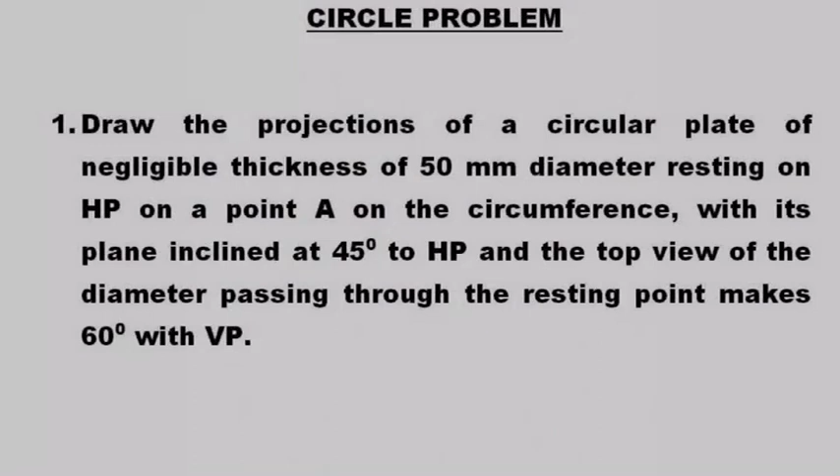Hey guys, in this tutorial video, you're going to learn how to orthographically project a circular lamina. Let's look at the question, note down the data one by one, and let's start solving this problem.

So here we have the data from the question that we read just now. In this problem, the lamina given is a circular plate with negligible thickness. When it has negligible thickness, the circular plate becomes a two-dimensional plane.

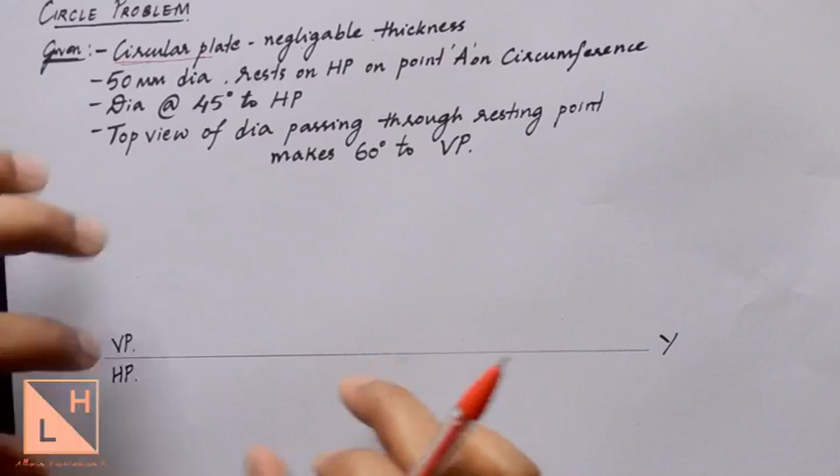Now, as usual, when we draw the first position, you need to answer two questions. Remember, whether you need to draw it in VP or you need to draw the plane figure on HP. Now, in order to identify that, you can go on reading the question.

This lamina is having a diameter of 50 mm and it rests on HP. When the lamina rests on HP, you must draw the plane figure on HP itself, that is below the line.

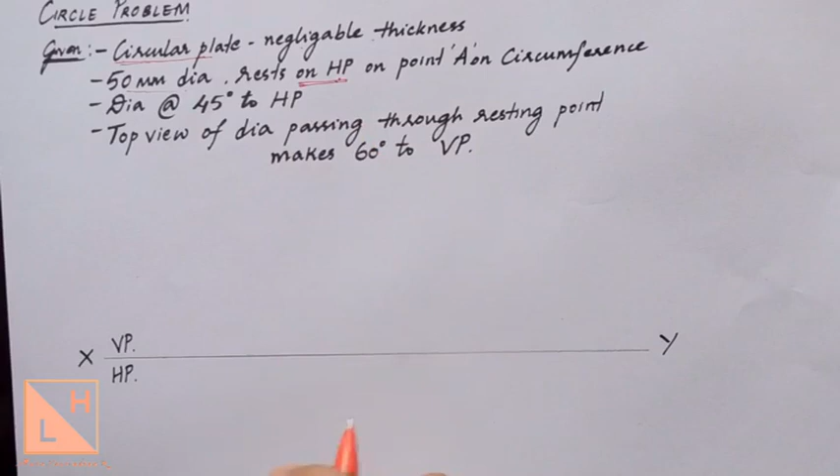The diameter given here is 50 mm, so we'll take the radius of 25 mm in the compass and draw a circle on the horizontal plane. Mention the diameter given as 50 mm in this problem.

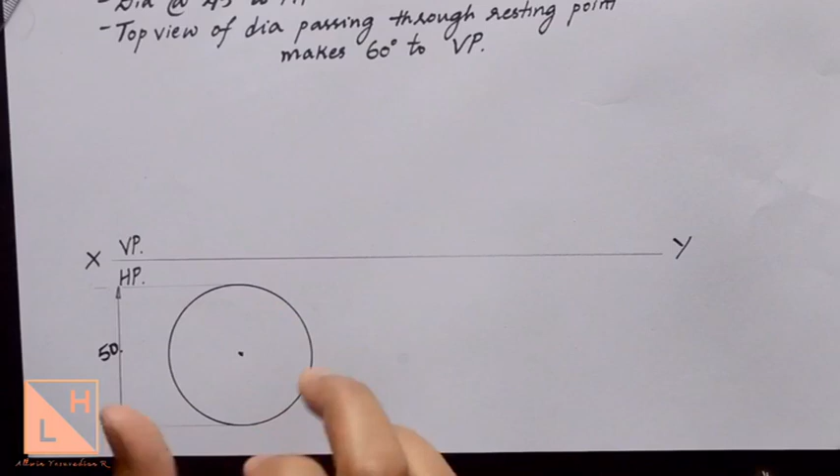Locate the center. Now we do not have any corners to name in this circle, but in order to project it by applying the conditions one by one, it is required that we must have some reference points in order to shift the circle from one position to another and then proceed with respect to the given conditions.

So what we do when we have a circle problem is divide this circle into an equal number of parts. There is no rule that you have to divide it into 4 parts, 2 parts, 8 parts or 16 parts. It all depends on you. But the best number to divide the circle in plane surface is 8.

Now let us divide the circle into 8 parts. As we know, the total angle for a circle is 360 degrees, so divide that into 8 parts. We need to draw 45-degree lines continuously so that we get 8 parts equally divided.

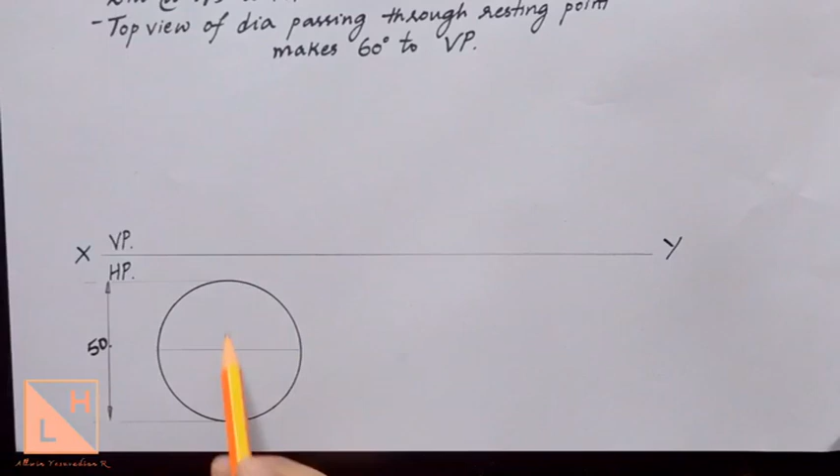So now it is divided into 2 parts. Now it is divided into 4 parts. Use a protractor, mark a 45-degree line on both the sides.

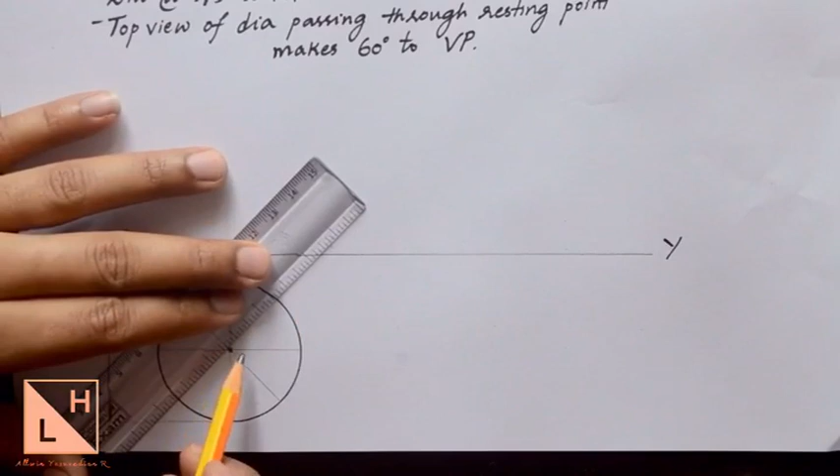So now we have divided the circle into 8 equal parts. Remember, only the lamina should look dark. All these lines drawn to divide the circle should be drawn with thin lines.

Because this is nowhere related to the plane, we are generating these lines only for our reference to project the circular lamina in the next positions. So you can name them right from the first point, but before naming it, let us look at the question.

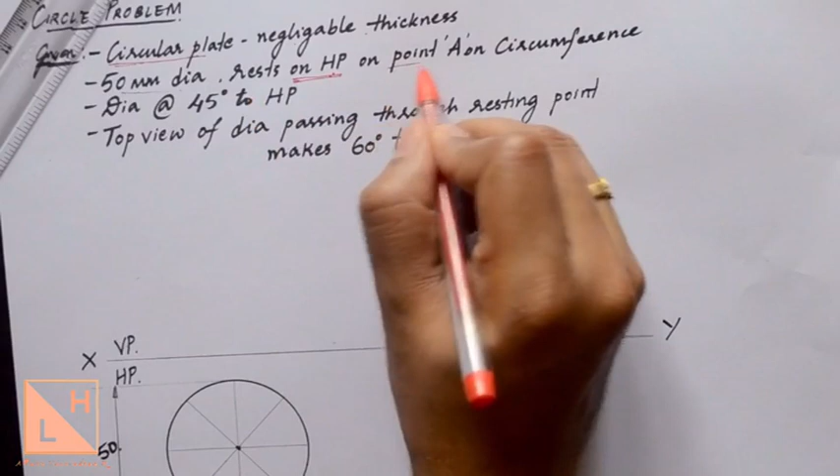It says that the lamina rests on point A on the circumference. According to the drawing procedure that we do in the previous problems, the reference point, whether it is resting on edge or resting on corner, we always used to keep it on the left side.

Now this is resting on a point and the name of the point is also mentioned as A. So we will name this point A on the left side of the circle.

That completes the top view of the circle. Now if the lamina is looking like a plane in the top view, it must look like a line in the front view. So let us draw projection lines from all the points that we have got here.

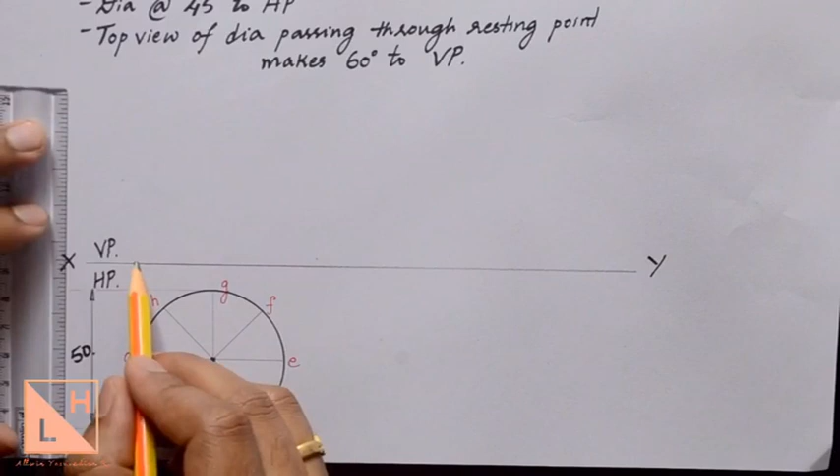Above A you will get A dash, and likewise. So this is point A. Above A you will have the front view of point A, that is going to be A dash.

Looking from bottom to top direction, the first point is B. On the same line we will also find H. So B and H will be together, but H dash should be in bracket because it is behind B.

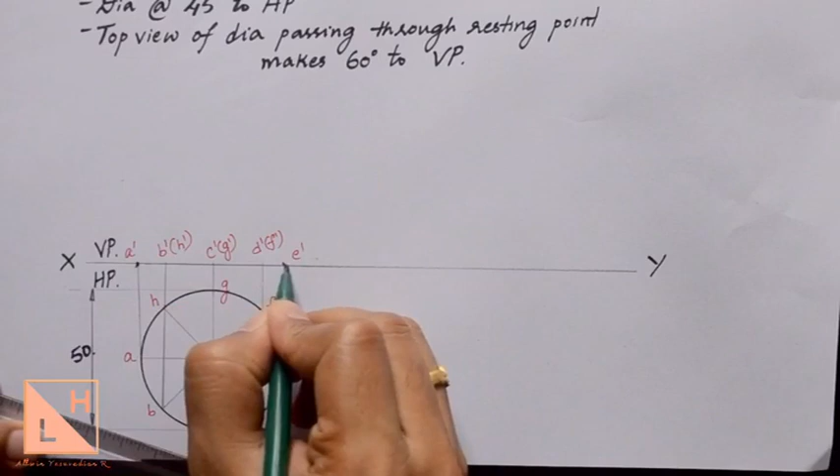Do not forget to darken the front view of the lamina. The front view has to be drawn from the leftmost point to the rightmost point of the circle. The leftmost point is A, the rightmost is E. So connect a line for the front view from A dash to E dash.

So we have done with the first position. Let us look into the next condition that we need to implement in the second position.

So if you just have a look at the given conditions, we have a circular lamina, 50 mm diameter, resting on HP on point A. All these things are done. So we have one condition with HP and one more condition with VP.

Which condition should be taken first? Just refer to the first position where you have drawn the plane figure. In this particular solution, we have done the plane figure in the top view because the lamina was resting on HP. So where you have the plane figure, take the condition with respect to that plane and implement it in the second position.

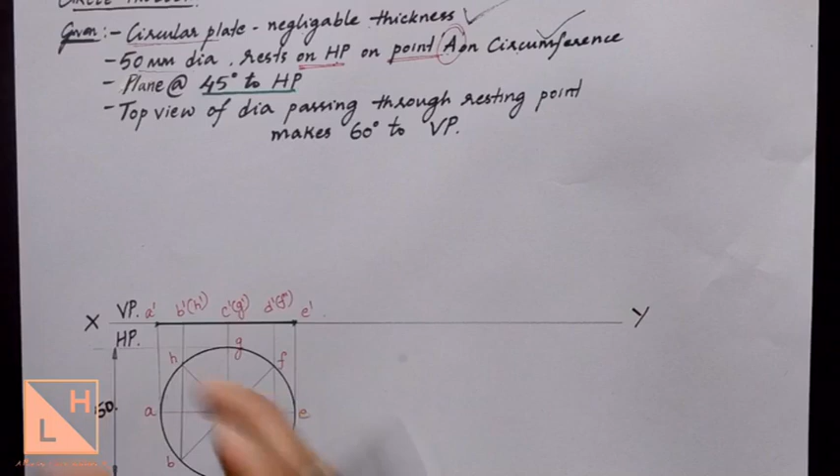So plane is on HP, take the condition with HP first. So when you have angle with respect to HP, that is plane itself is inclined at 45 degree to HP. Angle HP, you are going to draw that in the opposite plane, that is VP. Right now in VP, the plane is looking like a line which is at 0 degrees because it is horizontal. So in the next position, we need to incline this at an angle of 45 degrees with respect to XY line.

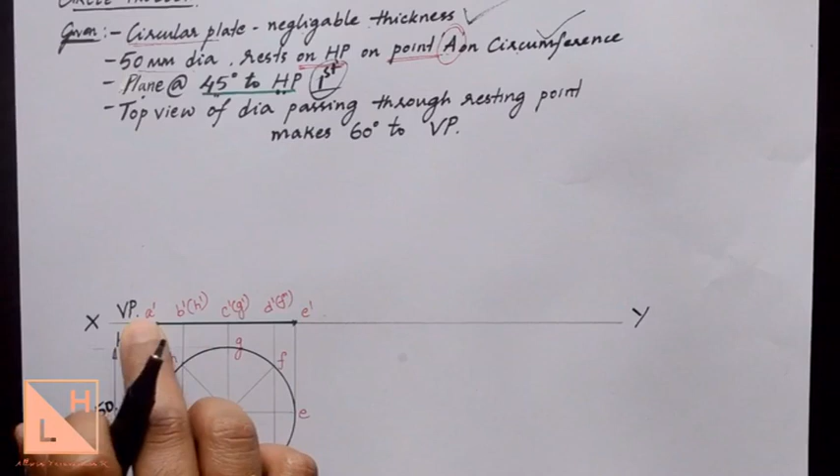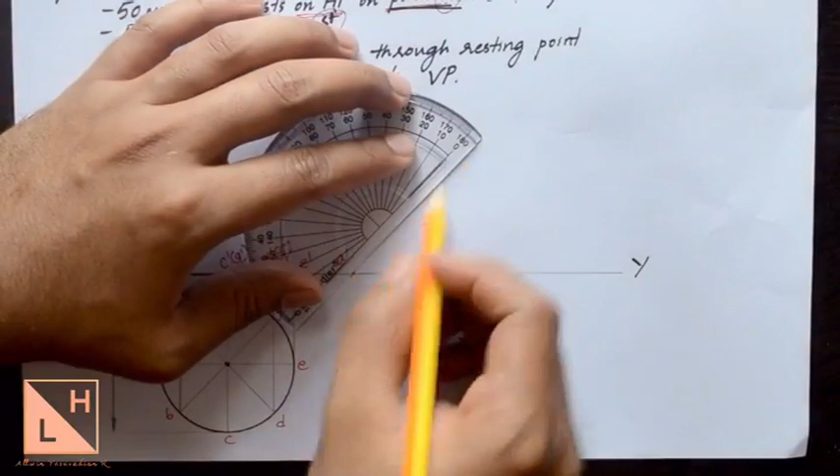Do not forget, make sure the leftmost point still rests on the XY line because the lamina is resting on point A, which means that when you go ahead in the second position, the first thing you do is mark the point A dash. From here you can draw a 45 degree line. You can use a protractor, draw a 45 degree line with respect to XY line. The leftmost point, that is A dash, should be touching XY line only. Use a compass, measure all the remaining distances and plot it in the second position.

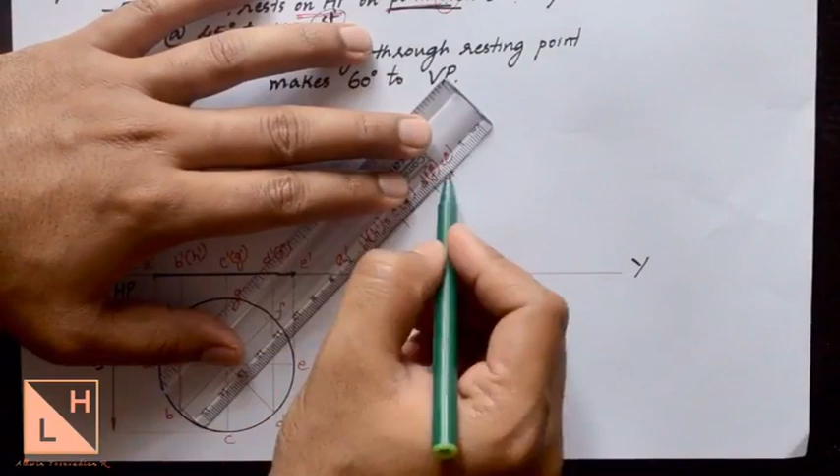Join this with a dark line from A dash to E dash. While the measurements are taken, make sure you refer the point A dash to B dash, then you draw the arc from A dash to B dash. Next, when you take the arc from B dash to C dash, remember to take the measurement from B dash. Do not make a mistake measuring from A dash, it will go wrong. The same distances has to be projected in the next position.

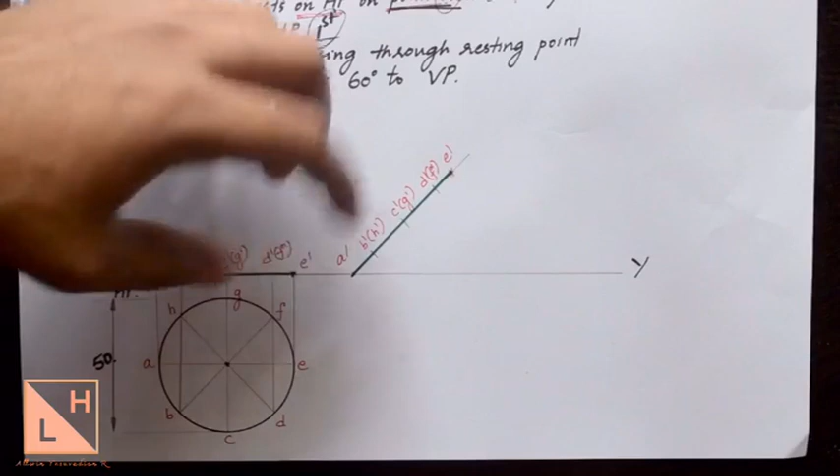Now to complete the top view, draw projection lines from every point. When you start from A dash, draw a vertical line till it reaches the horizontal line from point A. So this will be the new point A. Do the same for the remaining points.

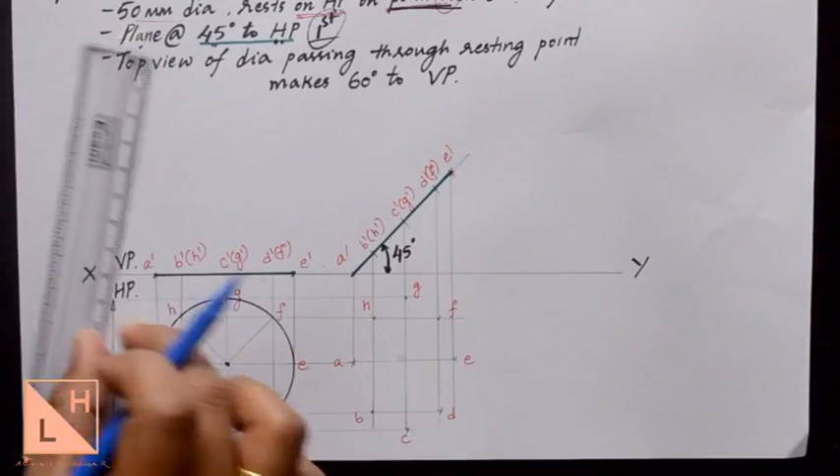Now in the second position, the circle looks like an ellipse because the plane is looking like the original shape only when it is parallel to the XY line. Now it is inclined at 45 degrees. The circle will now look like an ellipse. To draw an ellipse, you can't use a compass or any other instrument. It is advisable to join these points with a freehand sketch so that you get the ellipse. Connect with curves with a smooth hand and you will get the ellipse. This ellipse should be drawn with a dark line only.

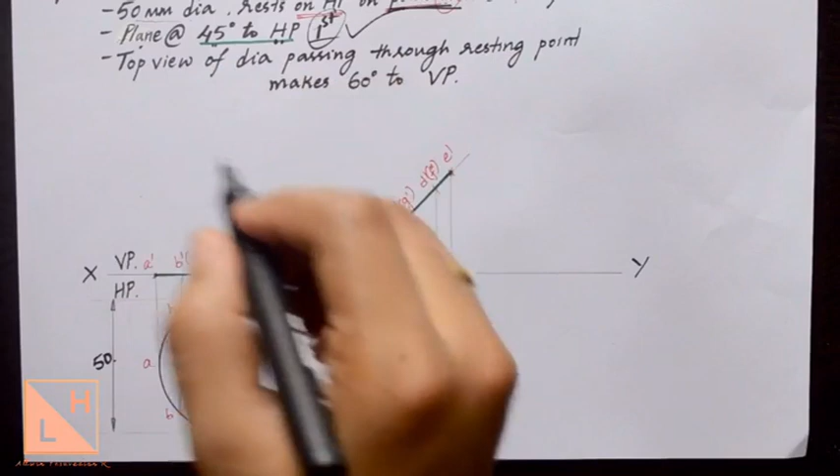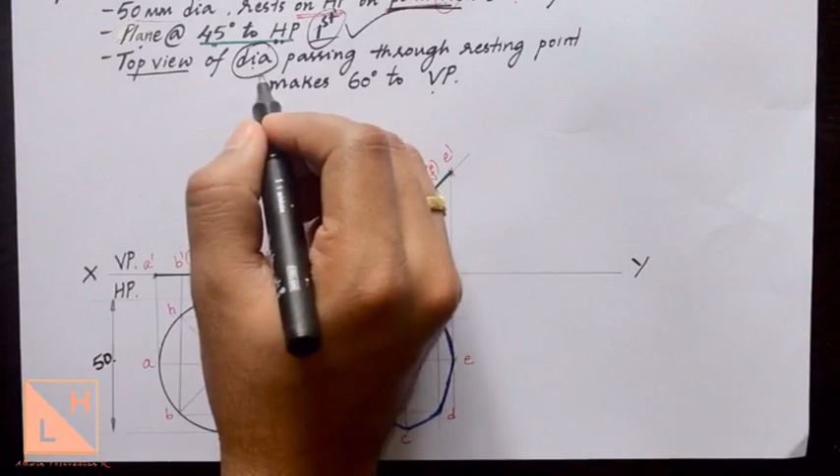Once the top view is completed, you can refer the given data. So plane is inclined at 45 degrees to HP. Next we have one more last condition, that is something is making 60 degrees to VP. If you read the question completely, that is the given data, the top view of diameter passing through the resting point. So in fact, the diameters that you will be able to draw for a circle are going to be infinite. You can draw infinite number of diameters, but here it is given that the top view of the diameter passing through the resting point. So the resting point here will be identified by looking at the second position. You can see A dash is on XY line, so the resting point is A dash. So the diameter passing through this resting point A dash is going to be AE.

Now do not forget, before you go to the third position, it is important to check whether you are going to get any apparent angle or not. So since we are going to incline it into the top view, you need to check whether you are going to have beta or not in this particular problem. So if you read the question on the given data again, the top view of the diameter, so it is mentioned as top view. Either top view or appears to be is given in the question. I have told you in the previous videos also, if any of these are given, the given angle itself is nothing but the apparent angle.

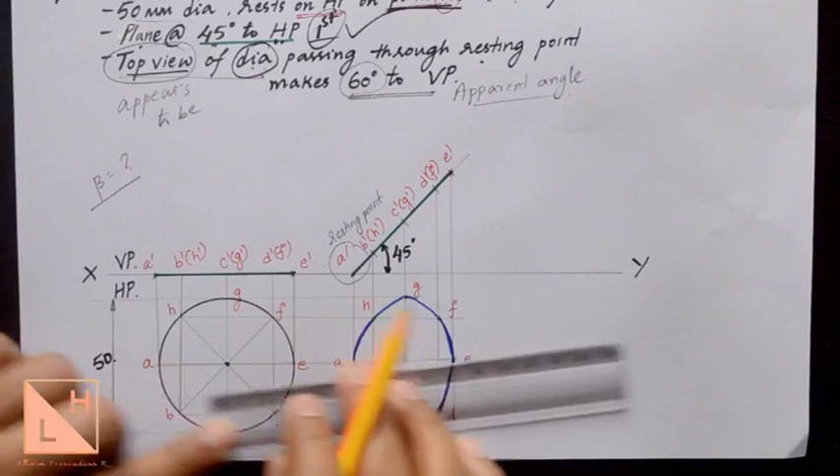Now if you check the length of the diameter in the first position and in the second position, in first position you will find it as 50 millimeters A to E, and in the second position the diameter would have been reduced. Here it is 37 millimeters. So since the diameter is reduced, you need beta angle here for the third position. Whether to find it or not, no, it is not required to find out because the beta is directly given in the question as 60 degrees.

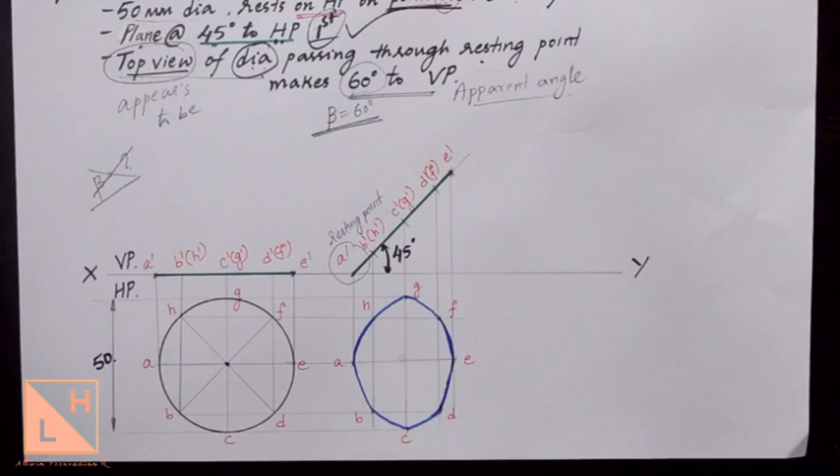So since the angle is given with respect to VP, we need to draw that in HP. HP is found below the line. So draw a 60 degree line with respect to XY line. I have told you it is not mandatory that the 60 degree line should touch the XY line. So you can use a set square. Keep one of the edges parallel to the XY line. This corner will give you 60 degrees and draw a 60-degree line.

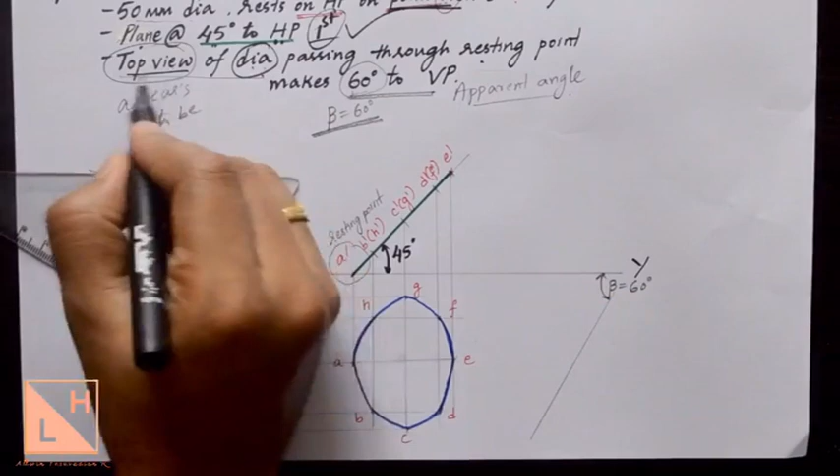Now what should be inclined at 60 degrees is the top view of the diameter passing through the resting point. So the resting point is A, and the top view of that particular diameter, the diameter which we have chosen according to the names, is AE. So this AE from the second position, not from the first, has to be inclined at 60 degrees over here. We will mark one of the points if this is rotated in this manner.

So I am going to have point A over here. You must draw this 60 degree line in such a way that the ellipse does not overlap with the second position, nor does it overlap the XY line. You must have enough space to draw the ellipse. If you feel that this space is not sufficient, you can draw the 60 degree line further ahead also. So measure A to E using a compass and cut the arc over here. This intersection will give us the point E.

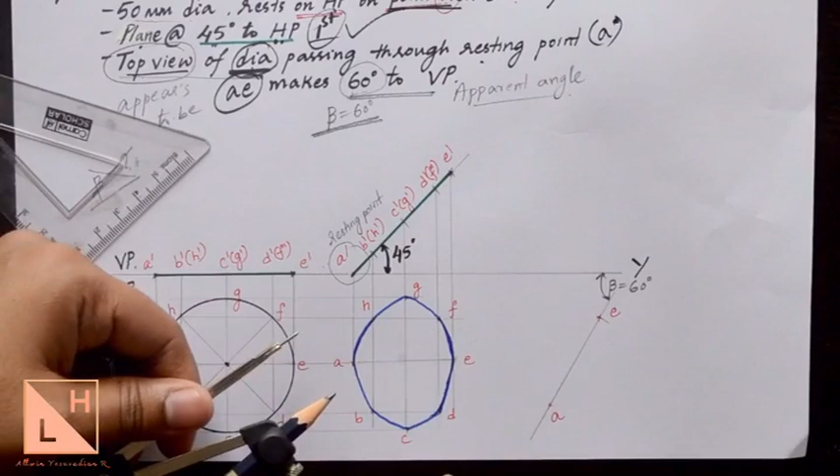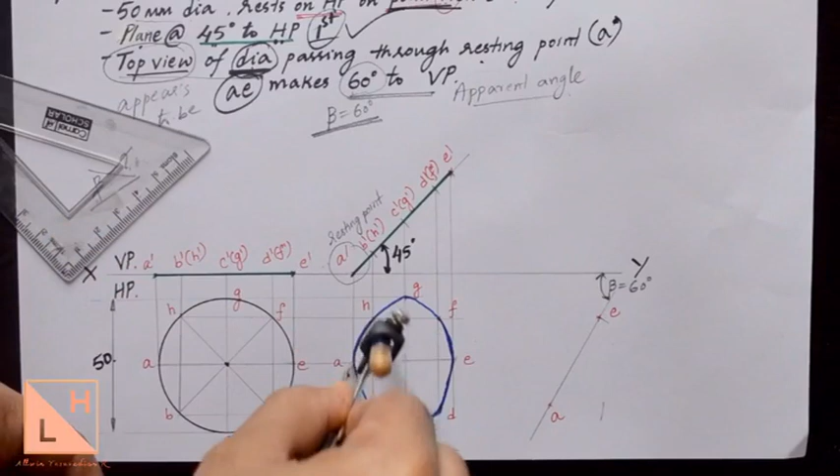Like previous problems, the other points have to be brought up over here using the arc method. I'll show you for a couple of points. All the points should be measured from the first 2 points that we have marked, that is A and E. So I am measuring from A to B. In fact, if you measure A to B and A to H, both will be the same distance, right? So as we cut the arc below, you can cut the arc above also, because below A we get B, above A we get H.

The next measurement should be taken from E till the point B, and it will be the same distance over here for H also. E to B and E to H will be the same. These two intersections can be named as B and H. We'll repeat the process for the remaining points.

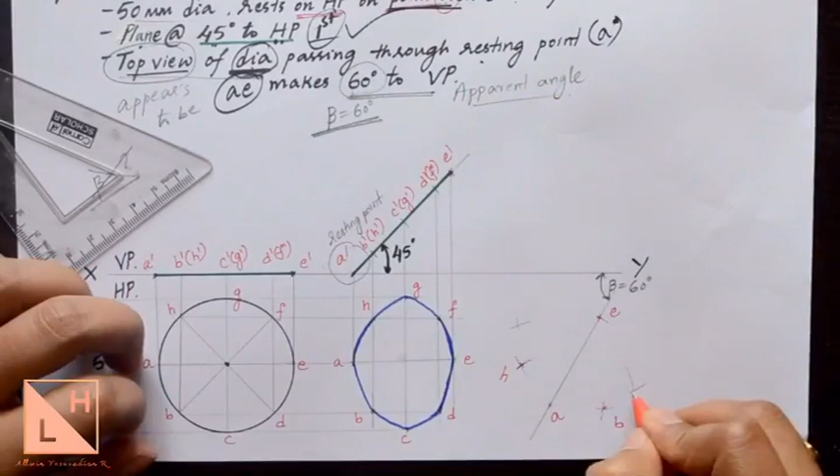Now we need to project the ellipse over here for the third position. We again use a freehand sketch, drawing a smooth curve to connect these points and form the ellipse. Depending on how smooth you draw the curve, you will get a more appealing ellipse. Anyhow, it should be connected with a curve. Now all the conditions are applied.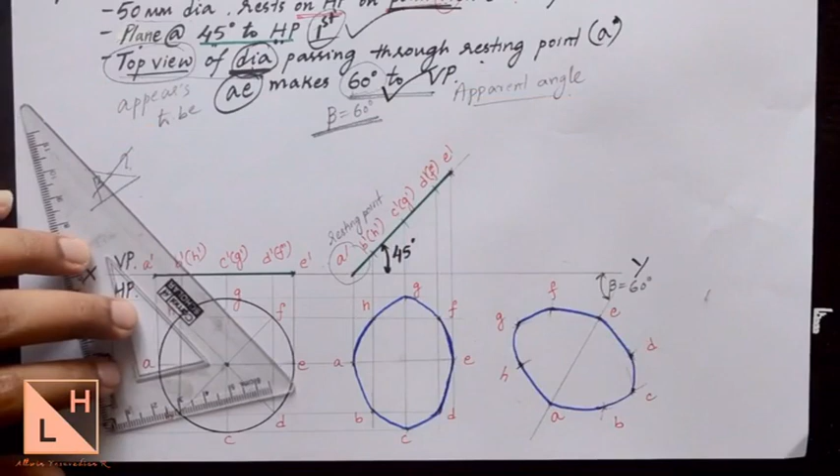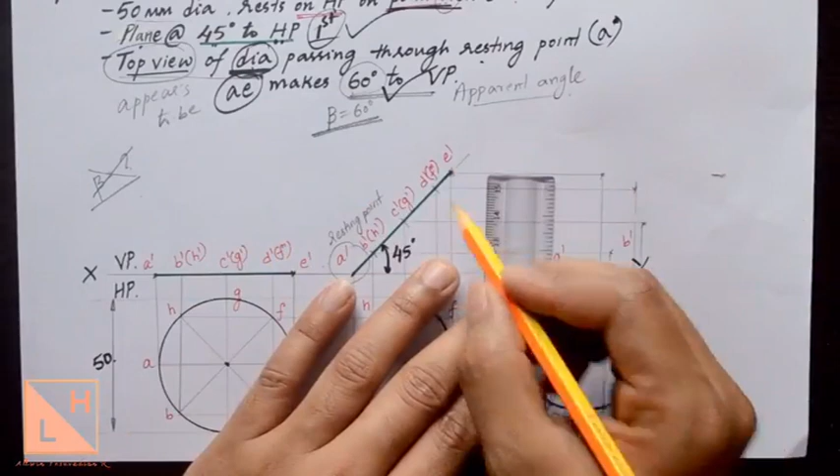The last thing we do is connect the top view to the front view with the help of projection lines. Draw a line from A till it reaches the projection line from A dash, that is on the XY line. So this point will be the new point A dash. Do the same for the remaining points. And we get all the points in the front view by drawing the projection lines.

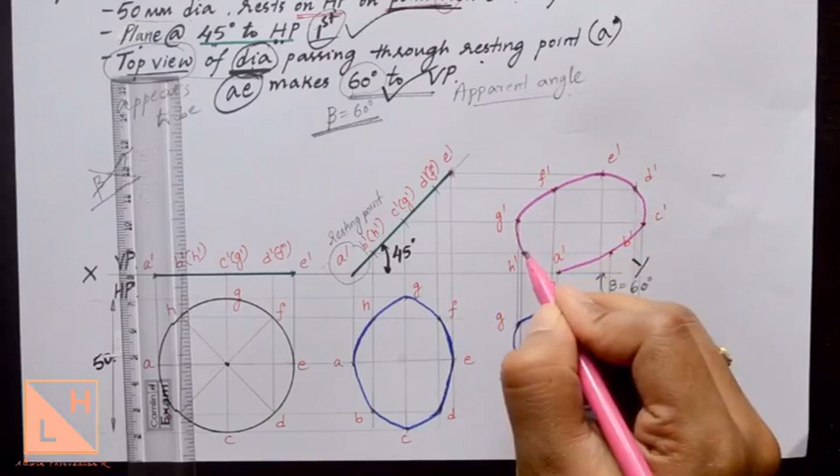Again, these points have to be connected with a smooth curve using your freehand sketch. Do not use scales to join them, because it is not a polygon. You need to draw a curve only. It comes by practice. As you practice, the curve you draw will become smooth. And that will complete the solution for this problem.

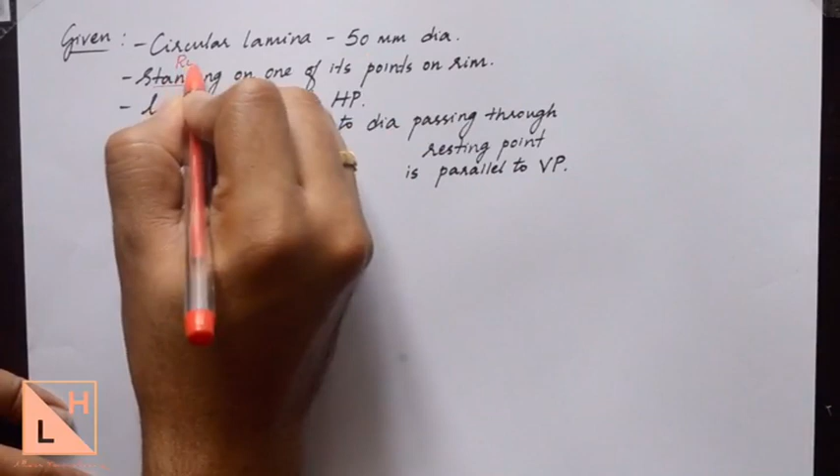Now let us look into another circle problem. Try to understand the different types of conditions that will come into the picture. Here we have the question. Let's note down the data and learn how to solve this particular problem. In this problem, we have a circular lamina of 50 mm diameter. Standing is one and the same as resting, because in all other questions we'll find it as rests on. Here it is given as standing on one of its points on the rim. The meaning of rim is nothing but circumference.

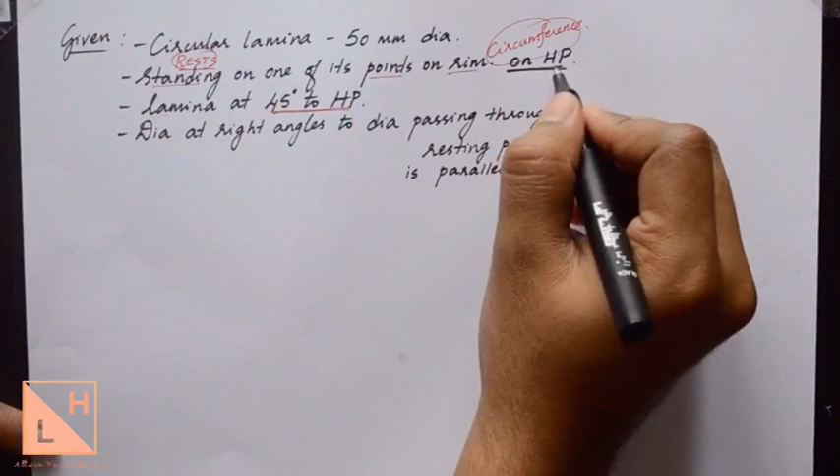So where do we need to draw the plane figure, whether on VP or HP? You go on reading the question. The lamina makes 45 degrees to HP, so you must draw the plane figure on HP itself. It is also given that it is standing on one of its points on the rim on HP. So we need to draw the plane figure on HP. Either you can refer to this data or the lamina inclination. The lamina inclination is with respect to HP, so the plane figure has to be drawn on the horizontal plane.

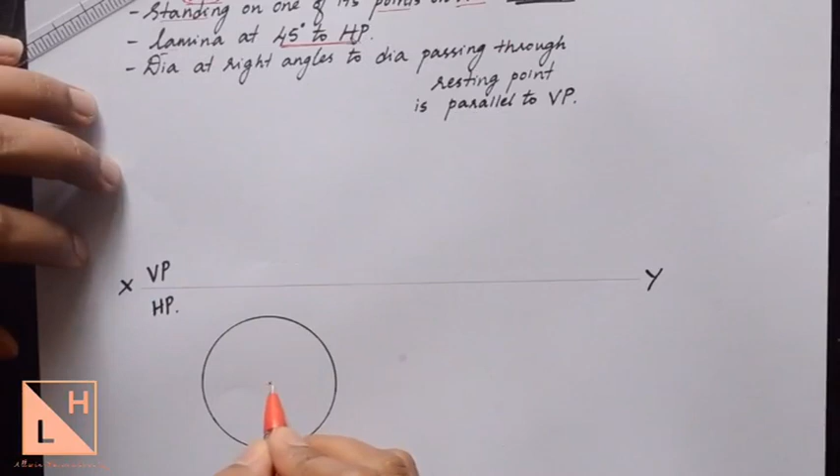So we will draw the circular lamina below the XY line. For 50 mm diameter, take a radius of 25 mm in your compass. Locate the center. We do not have any corners to be named, but since it is a circle, we need reference points, and we will divide this circle into 8 equal parts. 8 equal parts can be made by drawing 45-degree lines throughout the circle.

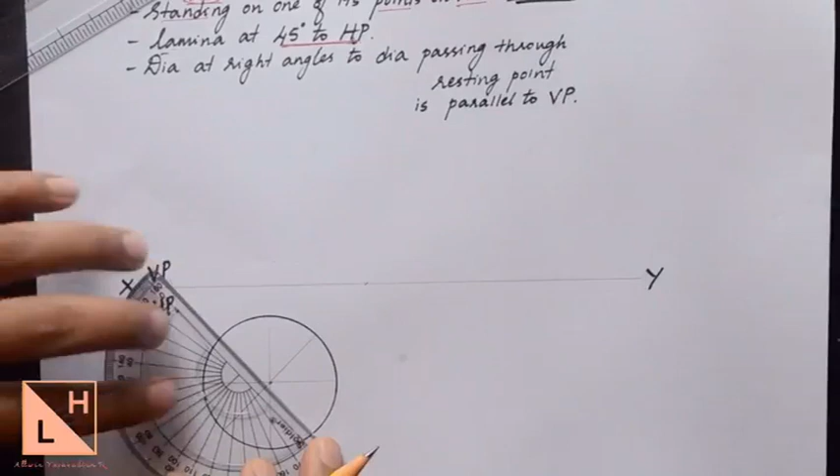Draw the front view of the plane with a dark line. The plane is looking like a line in the front view from A dash to E dash. That will complete the first position of the problem.

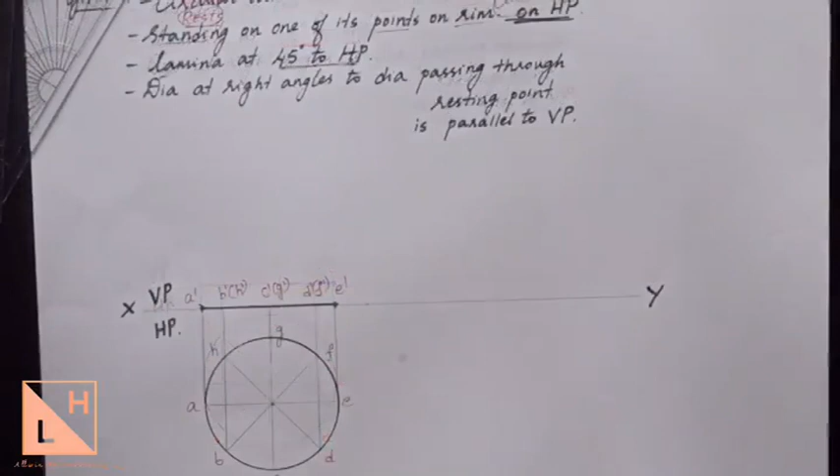Now looking into the next condition, we need to incline the lamina at 45 degrees to HP. So we have one condition with HP and one condition with VP. We will take the condition with HP first because the plane figure is drawn on the horizontal plane. So the lamina has to be inclined at 45 to HP.

Angle with HP, you draw it in the vertical plane. So right now in the vertical plane, the plane is looking like a line at 0 degrees. Take this same length of the plane and incline this line at an angle of 45 degrees. And while doing it, mark one point, that is the leftmost point, and name it first, that is A dash. From here you can draw a 45 degree line.

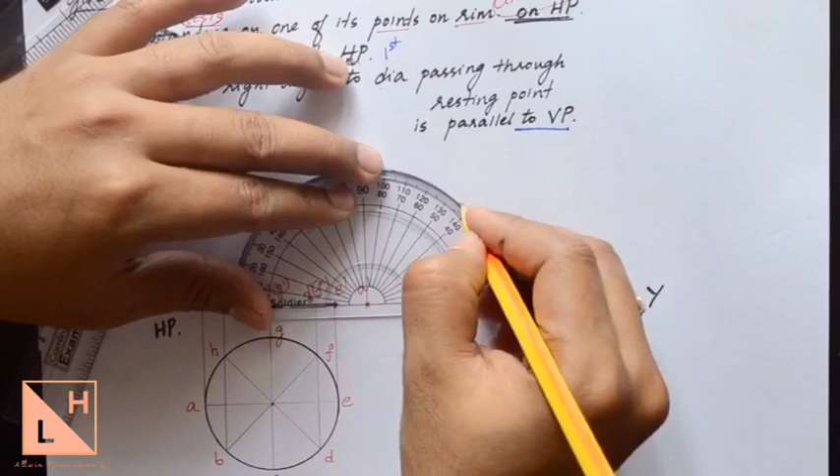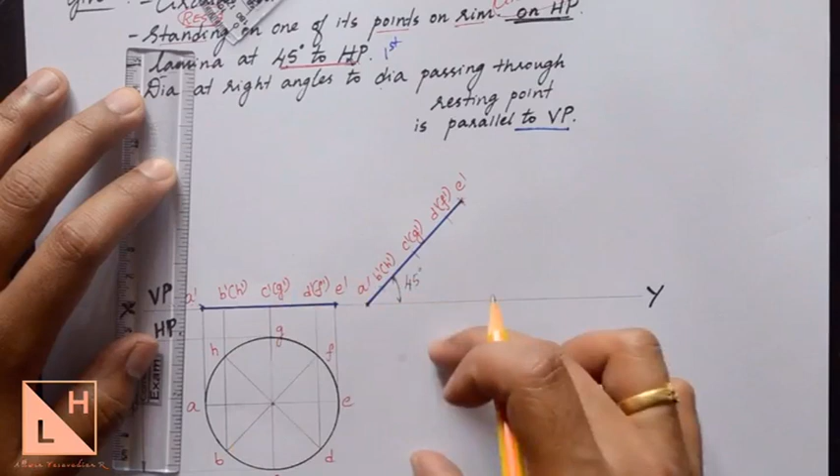Take the distances using a compass and cut the arc in the second position. That completes the second position front view, the lamina inclined at 45 degrees. To get the top view, draw projection lines from every point and connect them with horizontal projection lines from the previous position top view.

Locate the points properly by locating the projection lines that you have drawn. So this is B and B dash. Now we have got all the 8 points. Join them with a smooth curve using a freehand sketch.

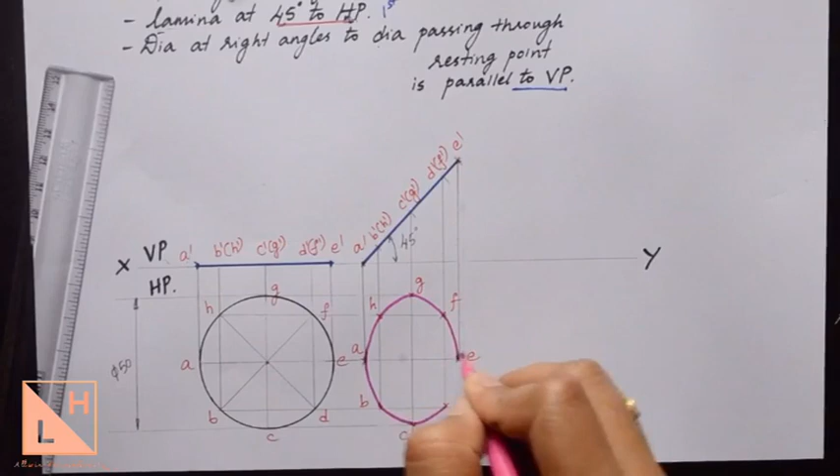So in this given data, as we are done with the circular lamina having one of the points on HP, we have done the lamina at 45 degrees to HP. The last condition is with respect to VP, something is parallel to VP. If you read it from the beginning, the diameter at right angles to the diameter passing through the resting point. So we need to take the diameter which is at right angles, that is 90 degrees, to another diameter which is passing through the resting point.

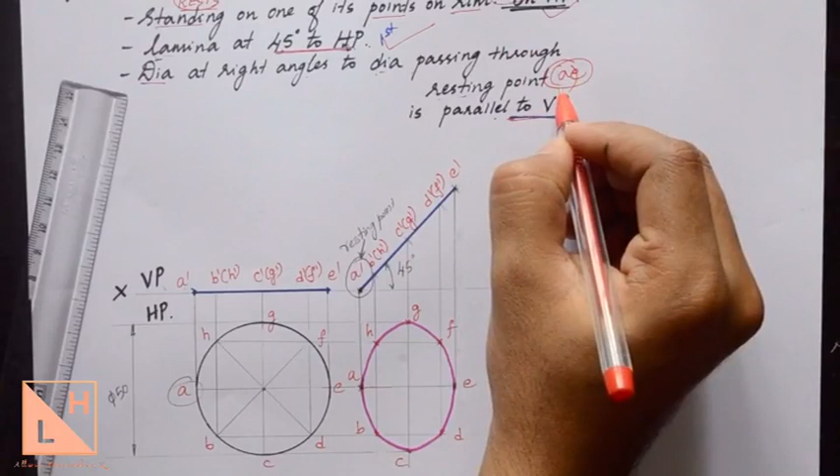According to the sketch that we have drawn, the resting point is the one on the left, that is point A. Or you can also refer to the second position, the one that is on the XY line will be the resting point. The diameter passing through the resting point A should be AE, right? So take this diameter AE and refer to the diameter which is perpendicular to AE, because we need the diameter at right angles to the diameter passing through the resting point. The diameter at right angles to AE is going to be CG.

So the condition given here is that the diameter CG has to be made parallel to VP. A condition with VP will be satisfied in the opposite plane, that is HP, right? So what is the current position of this diameter CG in HP? We have CG vertical. CG is at 90 degrees in the first position as well as in the second position.

Now remember, before you go to the third position, you need to check whether any apparent angle appears or not. When does an apparent angle appear? When the length of the element the condition is given with respect to is changed from first to second position, then an apparent angle exists. In this case, the element we need to check is CG, because the condition parallel to VP is with respect to the diameter CG.

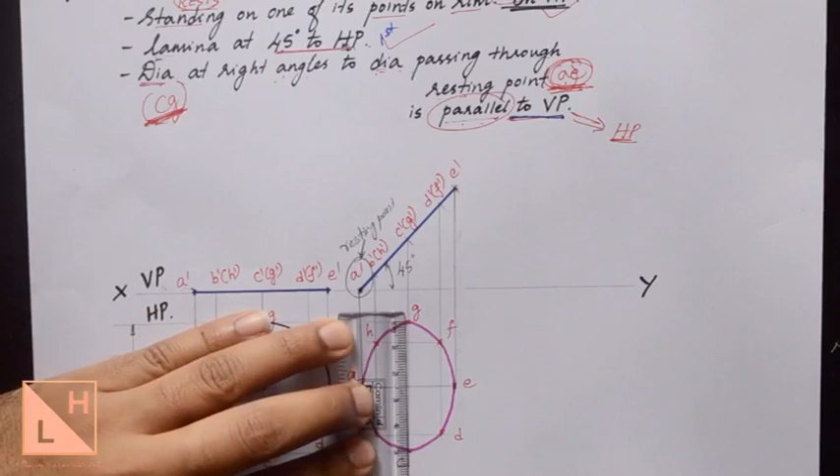Let us check the length of CG in the first and second positions. Here it is 50 millimeters, and it remains 50 millimeters in the second position. So there is no need to draw or find any beta angle in the third position. All we need is to make this CG parallel to the XY line. It is perpendicular, so we will make it parallel in the next position.

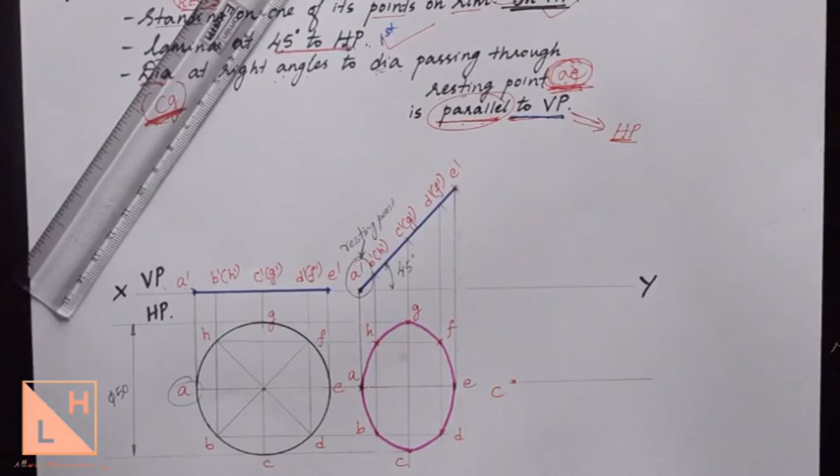So here I have drawn a parallel line. On this parallel line I have to mark the points C and G. I will select one point and name it C. Measure the distance from C to G using a compass and cut the arc here. This intersection will be G. Bring all the remaining points with the arc method using the compass. The points we know are C and G, so measure all the points from C and G only.

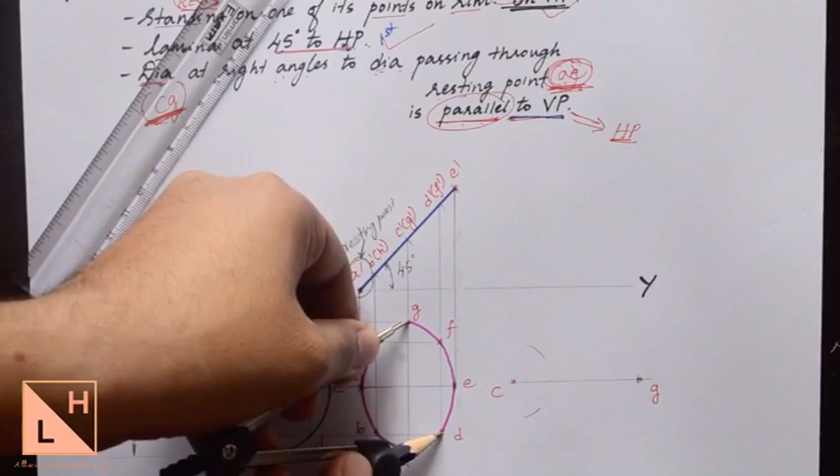The distance from C to B will be the same as C to D, so let us cut two arcs above as well as below. The other measurement has to be taken from G, so measure the distances of points B and D from G. The distance G to B will be the same as G to D. Where they intersect, imagine you are rotating the ellipse in this manner: points B, A, H will come above and D, E, F will come below. Repeat it for the remaining points.

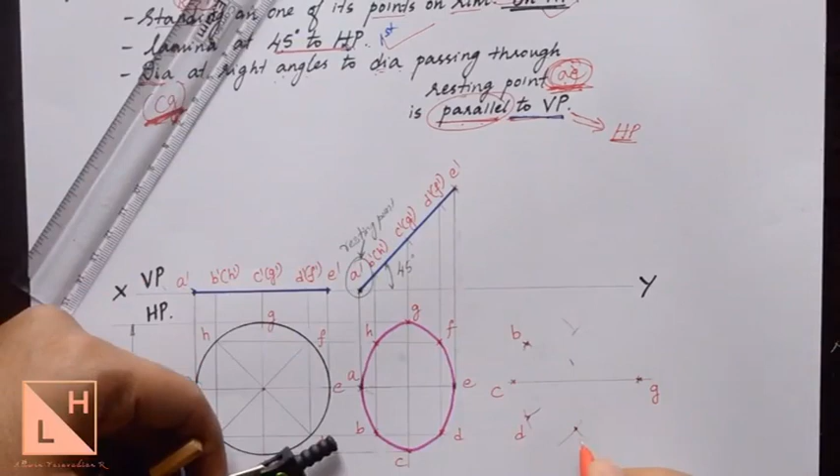Join these points with a smooth curve again to get the ellipse in the third position. That will complete the top view of the third position. From here we need to draw projection lines to the front view and connect them with horizontal projection lines from the second position.

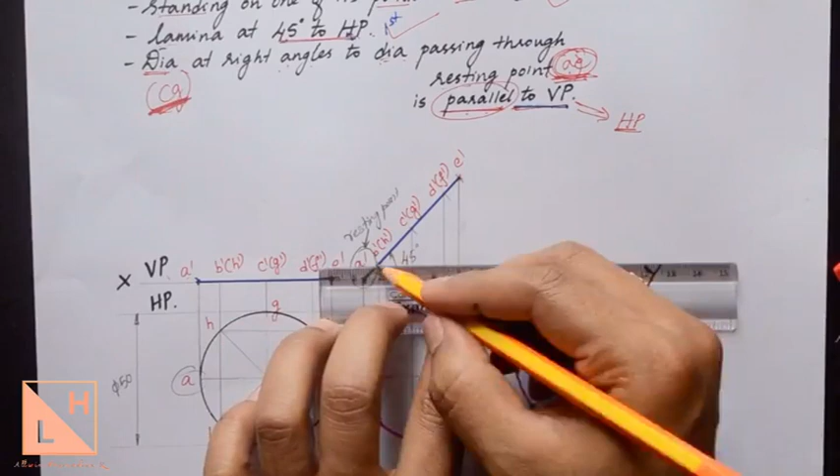We have got all the points by drawing projection lines. Connect them with a smooth curve again, that will complete the solution. That gives the solution for the problem.

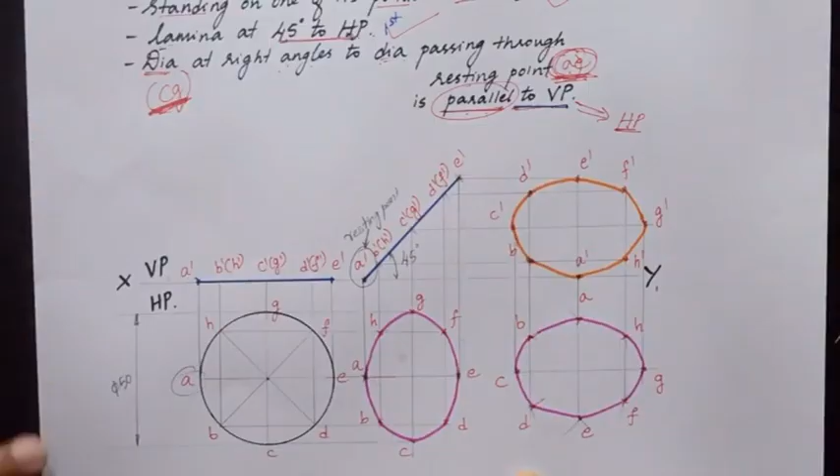Let us look into another circle problem where the conditions are quite different. We have a circular lamina which is going to appear like an ellipse in the front view. Let's note down the data and understand more about the question and try to solve this problem. This problem we have a circular lamina, but the diameter of the circular lamina is nowhere mentioned in the question. If we read through the question, the circular lamina is inclined to VP.

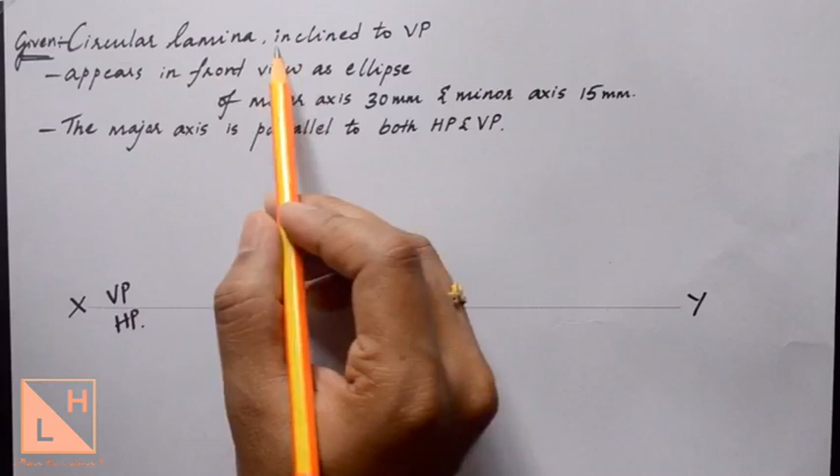So the lamina here is circle which is inclined to vertical plane, which means that we are clear for the first position, the question that we asked whether to draw on VP or HP. Now it is clear that since the lamina is inclined to VP, we need to draw the plane figure on VP itself. But the diameter of the circle is not mentioned anywhere. Let us read the question ahead.

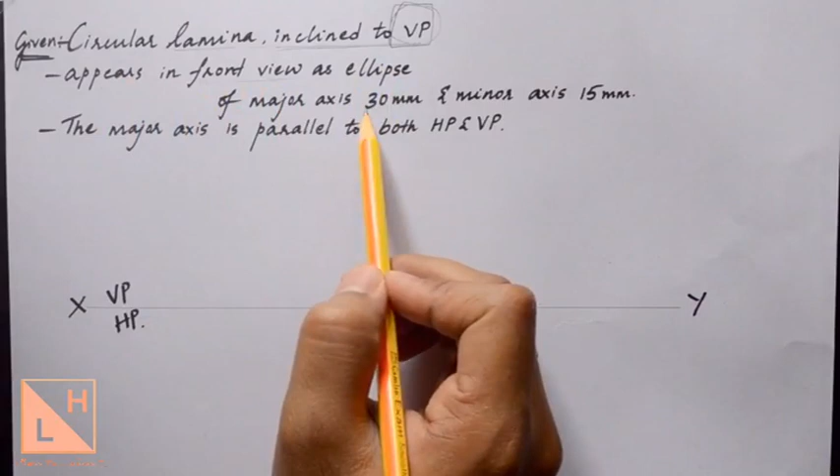The circular lamina appears in the front view as an ellipse of major axis 30 mm and minor axis 15 mm. So the ellipse dimensions are given because if you take an ellipse, the ellipse is always made up of two axes. One will be major, one will be minor. Major axis is the one that is having a larger dimension, while the minor axis will be the one that is having the smaller dimension.

According to this given data, the dimensions of the ellipse are given that major axis measures 30 mm and minor axis measures 15 mm. So this is the second position that we need to draw in the front view. So what will be the first position? First position should be the original shape of the lamina. The original shape of the lamina is circle.

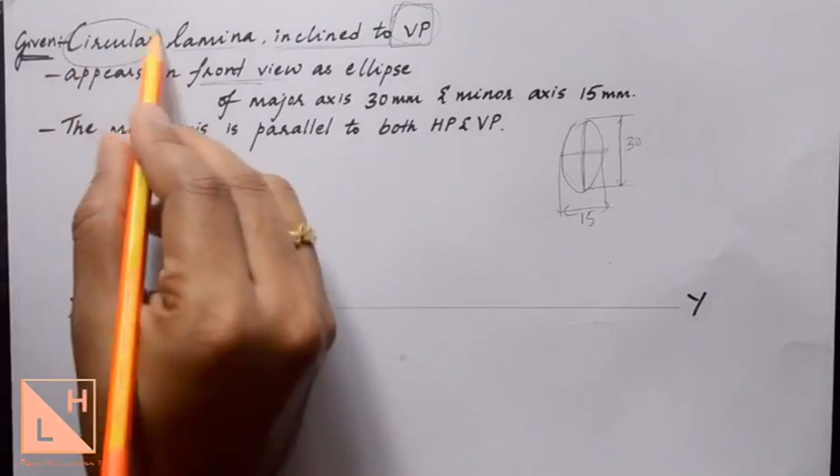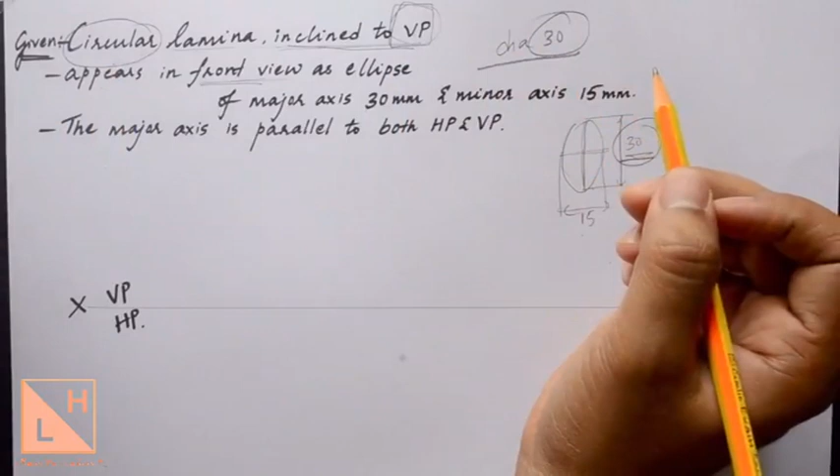Since the lamina is looking like ellipse in the front view of 30 by 15, obviously in the first position the lamina should be of diameter 30 only. This 30 millimeter reduces to 15 millimeter in the horizontal direction because of the inclination to the vertical plane. Hence, the diameter of the circle is identified as 30 millimeters. So, let us draw a circle of 30 millimeters diameter in the vertical plane.

Diameter is 30 millimeters. We will take the radius of 15 millimeters using a compass and draw it on the vertical plane. So we are done with the circle of 30 millimeter diameter. Let us locate the center and divide this circle into equal number of parts.

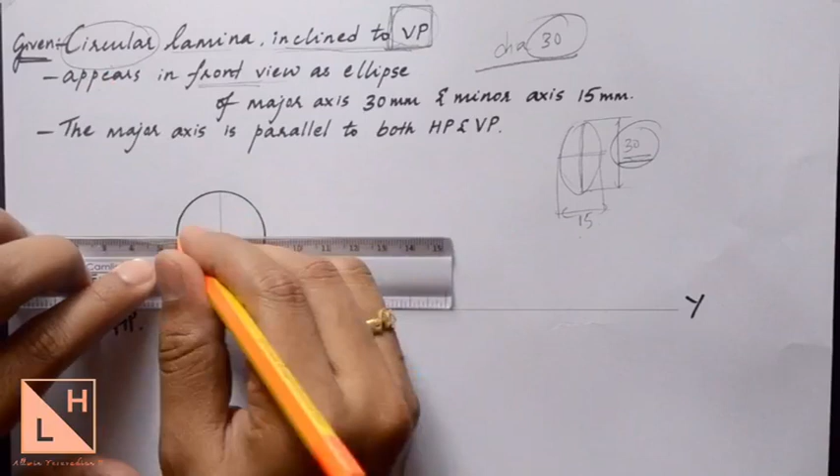Now, I have told you in the previous circle problems also, it is not mandated that you have to divide it into 8 parts or 12 parts. Here, since the dimension of the circle is very small, 4 parts is more than sufficient to generate the ellipse in the next position. So let us divide this into 4 equal parts. So we divide the circle into 4 equal parts. We'll name them, since this is VP front view, we'll name it as A dash. Do not forget to mention the diameter of the circle.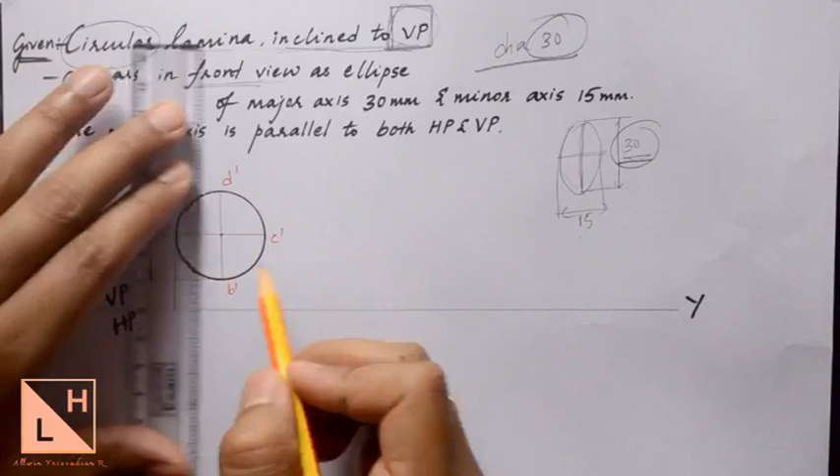Now that the front view is done, let us generate the top view by dropping projection lines. If plane is looking like a plane in the front view, it's going to look like a line in the top view. So below A dash we'll have point A. Seeing from top, first point is D and next is B, and here we have C. Draw the top view with a dark line for the length of the lamina, that is from A to C. Now this completes the first position of the lamina.

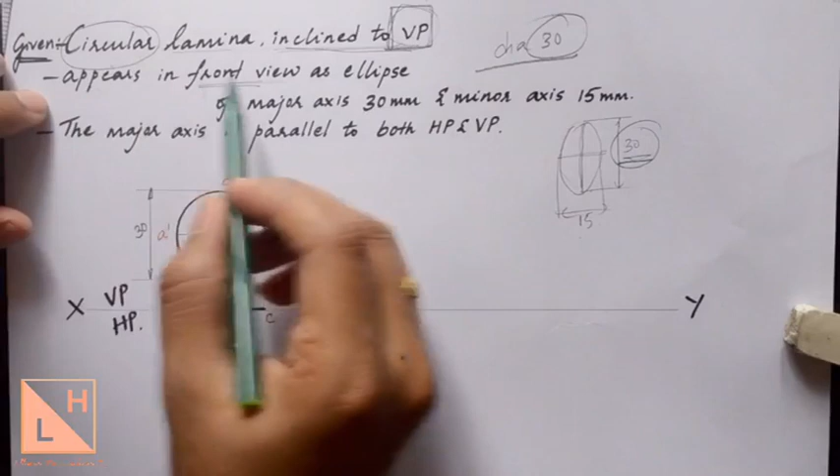In the second position, the question says the lamina is going to appear as an ellipse in the front view. So we need to draw an ellipse in the second position such that the horizontal dimension reduces to 15 millimeters, because the ellipse dimensions are given 30 mm major axis and 15 mm minor axis. So here this length of 30 millimeters will reduce only when we incline the lamina in the opposite plane. So in the next position, this line has to be inclined at some angle which we do not know, which we will identify by drawing the ellipse first over here.

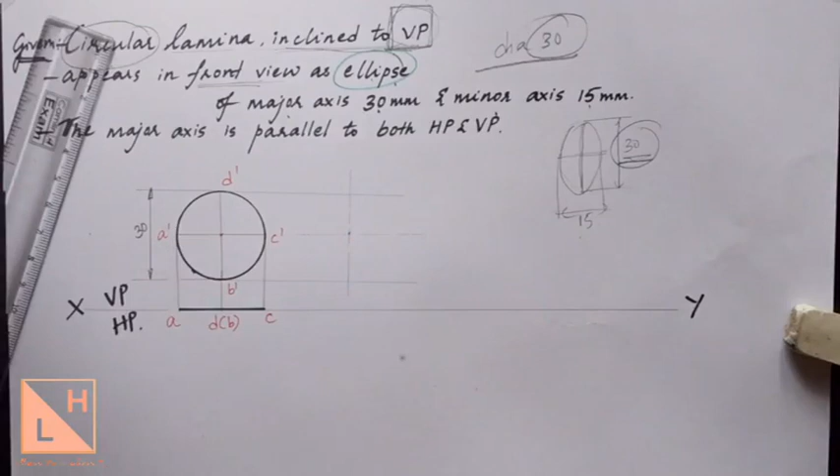The major axis is 30 millimeters, so we can draw 2 horizontal lines from the already drawn circle. Draw one vertical axis and draw one horizontal axis. This axis is only for your reference. This will be the center of the ellipse, from where we have to measure the dimension of major and minor axis. Since the vertical dimension is 30 millimeters, already it is marked 15 and 15 millimeters. Half of it will be there on either side.

So the minor axis can also be marked by taking half of the horizontal dimension, that is 15. So from the center it is going to be 7.5 towards right and 7.5 towards left. Let us measure it.

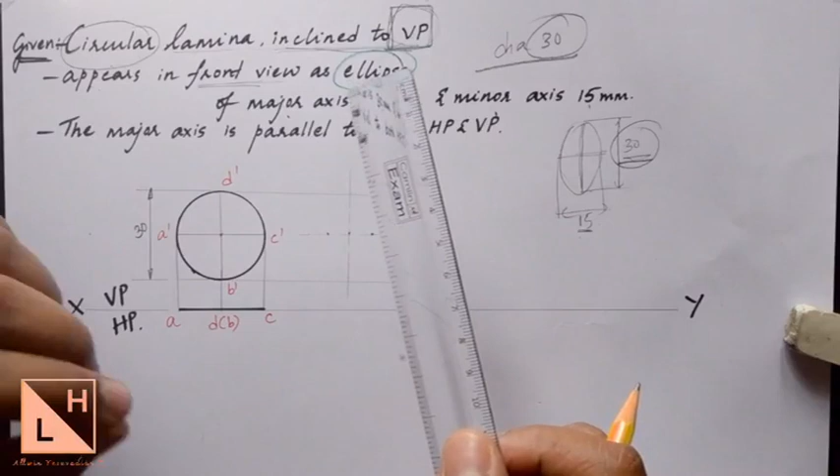Now remember, in the scale that you use, we cannot measure 0.5 millimeters, but you can place the point approximately between 7 mm and 8 mm and we'll take it as 7.5 millimeters. So now we have got the 4 points of the ellipse, which we can join with a smooth curve. The leftmost is A dash. Join this with a smooth curve so that we get the ellipse in the second position.

If you are not able to draw a freehand sketch with 4 points, you can generate more than 4 points, that is 8 points, and continue the same way of drawing it. Now the front view in the second position is completed. We need to drop the projection lines. In the first position, the length of A dash C dash was 30 millimeters, whereas here it is reduced to 15 millimeters.

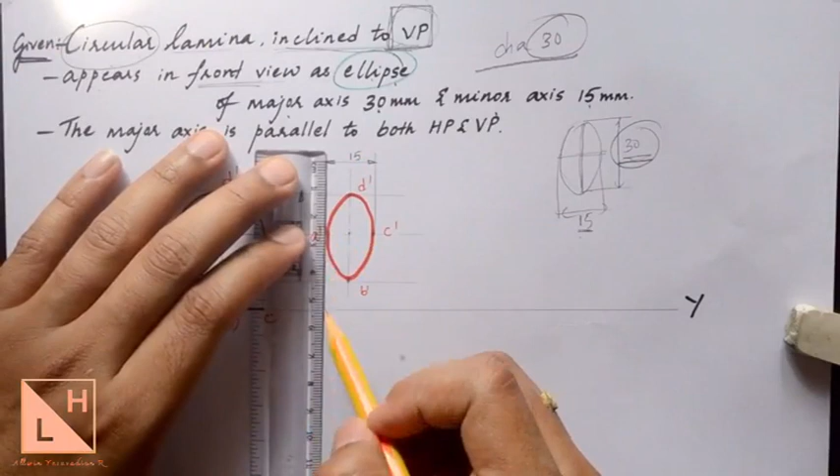Now drop the projection lines from all the 4 points to the top view. The leftmost point, that is A, is going to be a fixed point, so we will name that one as A. For the remaining points, the length of the line can be measured with a compass and cut an arc on this particular line that is coming from C dash, which is the rightmost point in the drawing. From A to C, and below A dash we have A. Similarly, below C dash we must find the point C. We have taken the measurement from the first position and cut an arc in the second position. Where it intersects, that will be the point C.

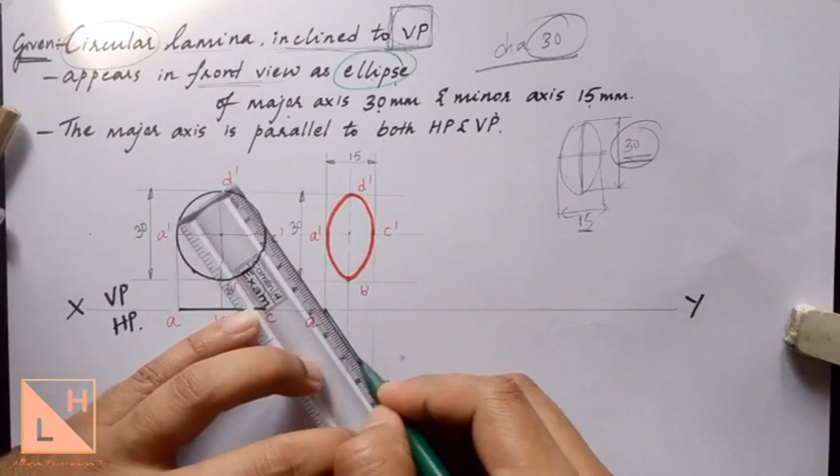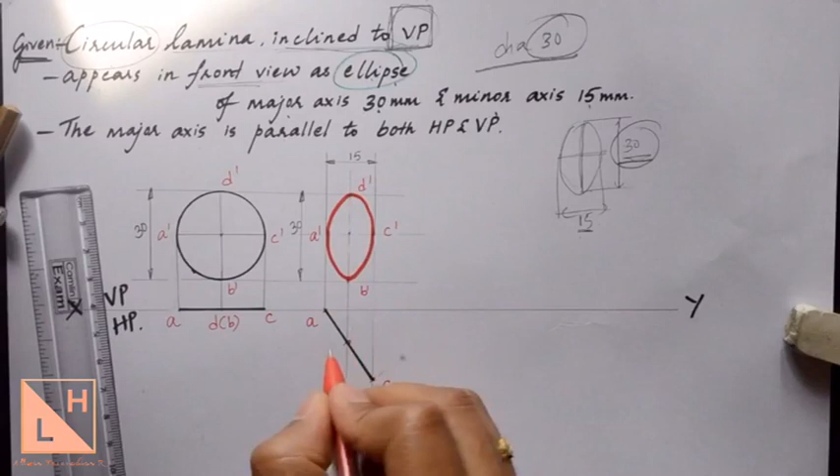Join A to C with a dark line, and we see here the lamina is inclined at some angle so that the circle looks like an ellipse in the second position. Now while you are drawing, do not directly take the angle; follow the procedure accordingly so that we will be able to find out that angle. That angle should be found out, not memorized or copied. In between A and C we have another 2 points, D and B, which will be found on the projection line of DB, which falls somewhere here. Measure the angle using a protractor: 60 degrees. Depending on the accuracy of your drawing, you will have 1 or 2 degrees on either side.

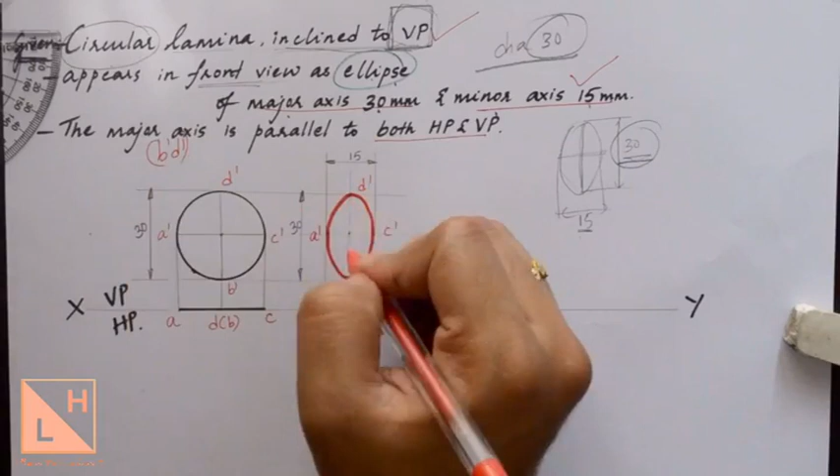If we just have a look at the given data, we have drawn a circular lamina inclined to VP such that the front view appears as an ellipse with major axis 30 and minor axis 15 mm. We have done with that. The last condition is that the major axis is parallel to both HP as well as VP. Now according to the procedure of drawing, the lamina has a major axis, that is B dash D dash. This major axis B dash D dash is already parallel to the vertical plane. So the only condition that remains is we need to make this major axis parallel to the horizontal plane.

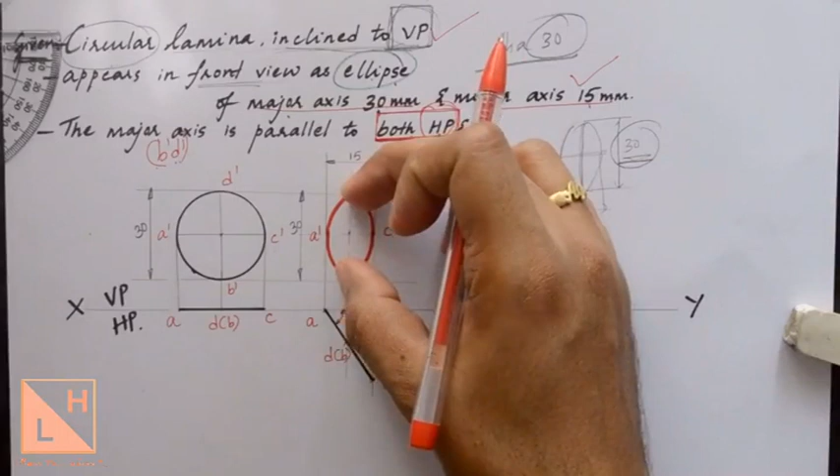So the major axis here is B dash D dash. For the HP condition we will be drawing it in the vertical plane. In the vertical plane, if you look at the major axis B dash D dash, it is right now vertical, that is perpendicular to the XY line. We need to make B dash D dash horizontal in the next position. You can draw a horizontal line and mark the point. If I am rotating it like this, the point will come over here. The other point now is D dash. So measure from B dash to D dash and cut an arc over here. This intersection will be D dash.

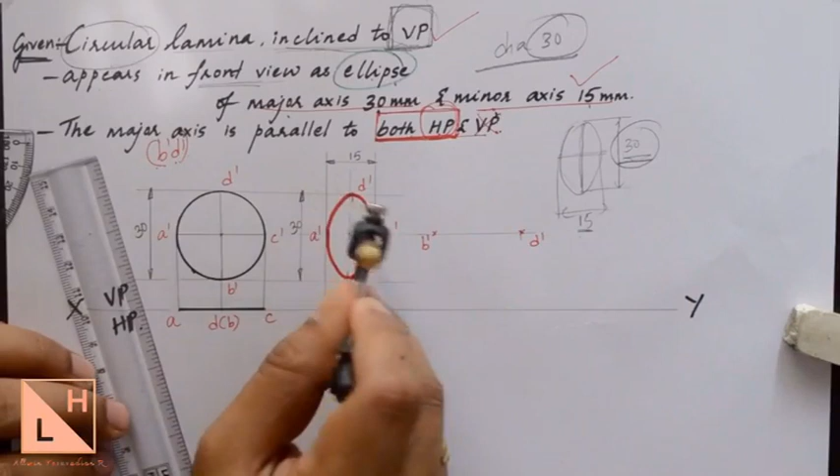You can find A dash and C dash with the help of the arc method itself. Measure B to A, B to C. In fact, B to A, B to C, D to A, D to C will all be of the same dimensions. So you can keep the compass needle at B dash, cut one arc above and one arc below. Keep it at D dash, cut one arc above and one arc below. Where they intersect, these points will be A dash and C dash. Once again we need an ellipse in the front view.

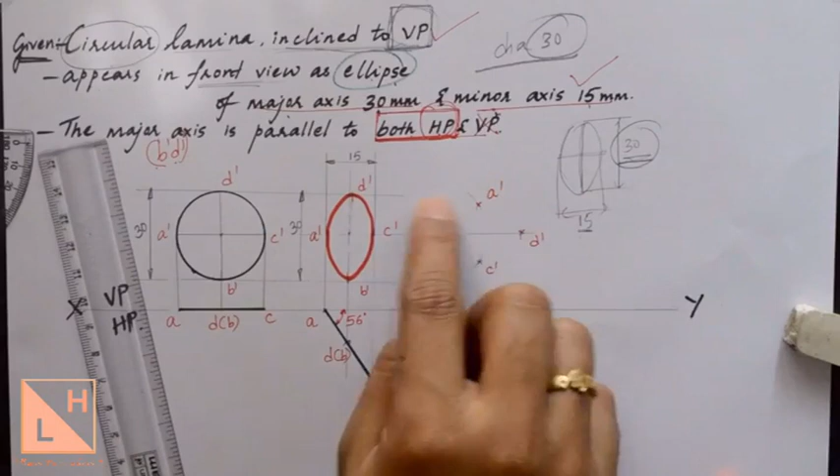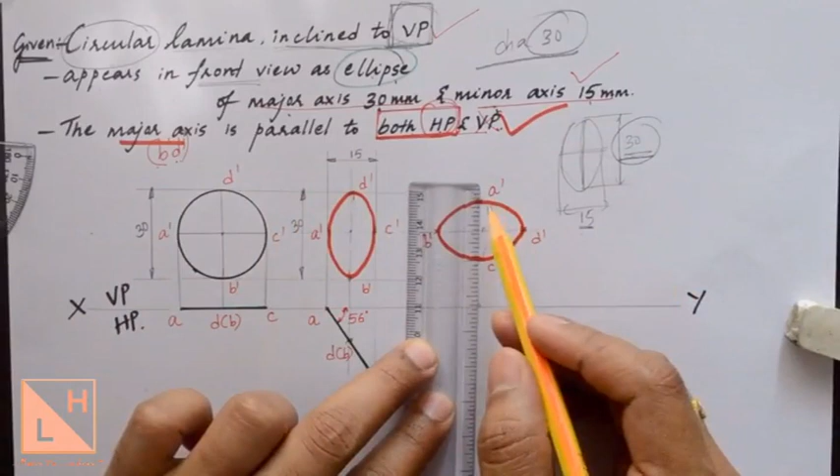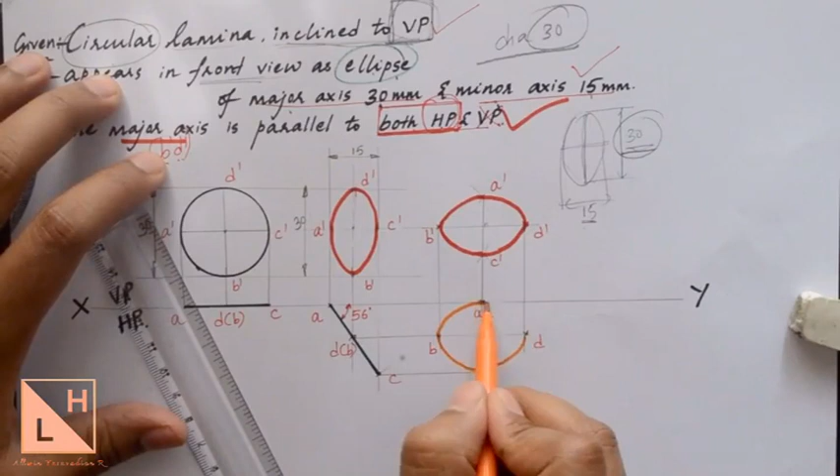So now we have the ellipse in the condition such that the major axis is parallel to the horizontal plane. The major axis is B dash D dash, and you see that it is parallel to the XY line at the moment. Now to generate the final position, you can draw projection lines from all the 4 points. Start from A dash till it touches point A. Hence we get the new points A, B, C and D. Join these 4 points again with a smooth curve; that will give us the final position of the lamina. That completes the solution for this problem.